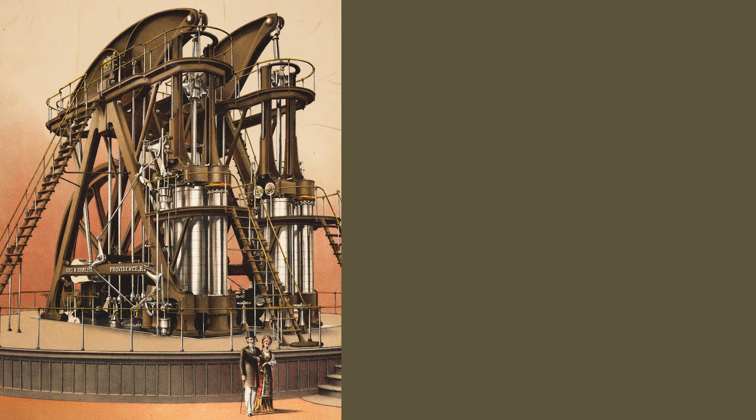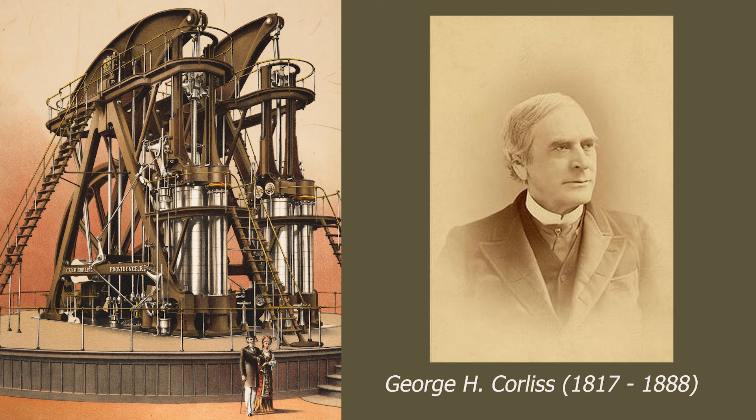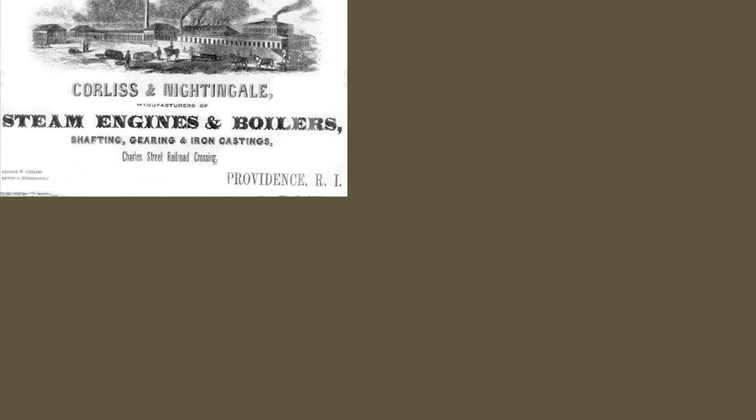George H. Corliss ranks with James Watt in his contributions to the improvement and refinement of the steam engine. Born in Easton, New York on June 2, 1817, he began his working life as a store clerk and inspector for textile manufacturers. In 1844, Corliss moved to Providence to organize a new company under the name Corliss, Nightingale and

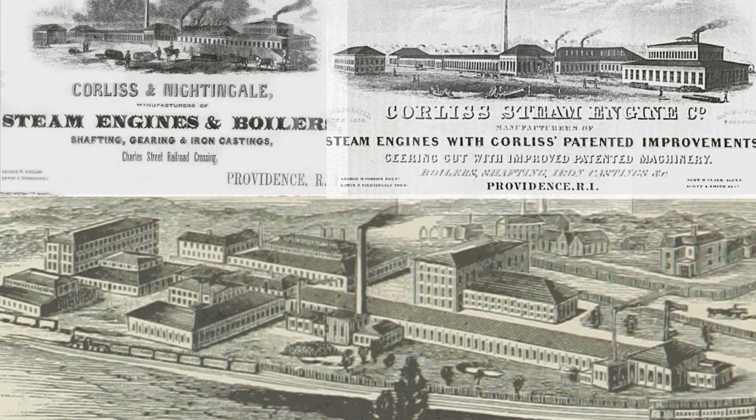Company. There, in 1848, Corliss invented an improved means for controlling the amount of steam admitted into the cylinder of a steam engine under varying load. The Corliss engine, in myriad forms, became the standard factory prime mover of the late 19th century.

To commemorate the 100th anniversary of the founding of the United States, it was decided to hold an international exhibition in Philadelphia in 1876. It was a great exercise in selling, as businesses in all fields and from all parts of the country and from abroad set up booths and exhibits in order to attract orders.

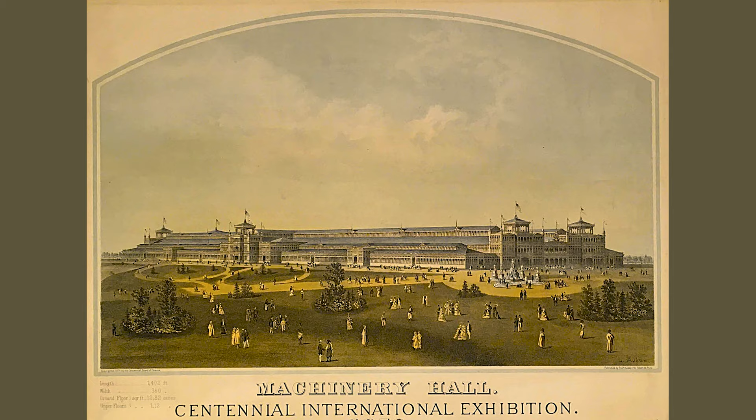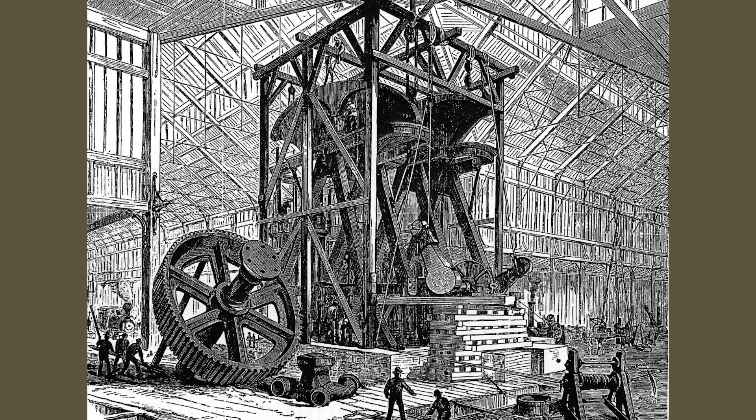Corliss offered to supply a single large engine with boilers and shafting to drive all of the main mechanical exhibits planned for Machinery Hall. All kinds of bureaucratic delays meant that construction did not begin until June 14, 1875, allowing only 10 months to design, build, transport, and erect about 700 tons of machinery.

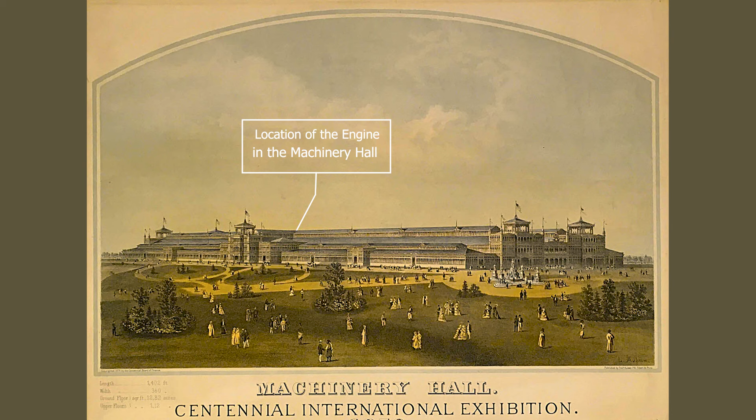Corliss's 1,400 horsepower monster engine, claimed to be the largest in the world, stood at the center of Machinery Hall, where the South Avenue intersected the central transept. The hall was 1,400 feet or 420 meters long, 360 feet or 110 meters wide, and stood 70 feet or 21 meters high where the engine was located.

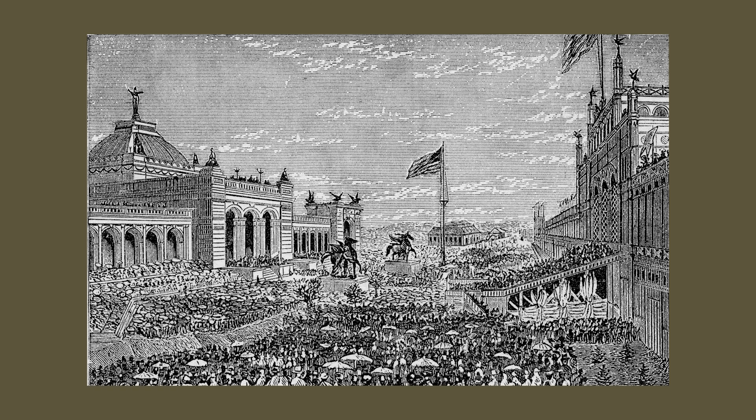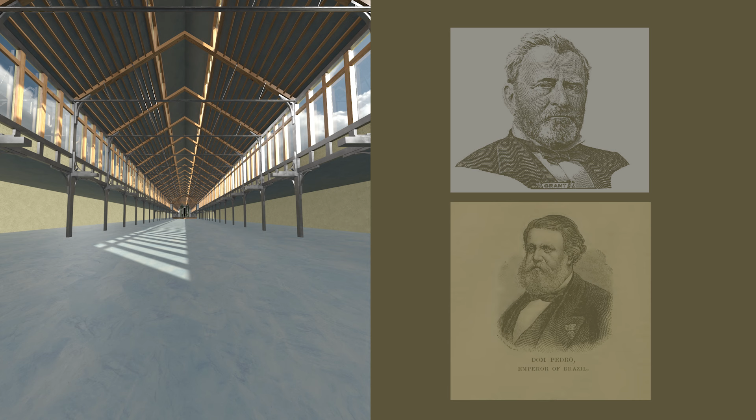The rain ceased on the morning of May 10, 1876, as tens of thousands of people gathered in front of the main exhibition building. After music, prayers, and speeches, President Ulysses Grant declared the exhibition open. President Grant and Emperor Dom Pedro of Brazil led a procession of officials and invited guests from around the world, touring through the main building and into Machinery Hall.

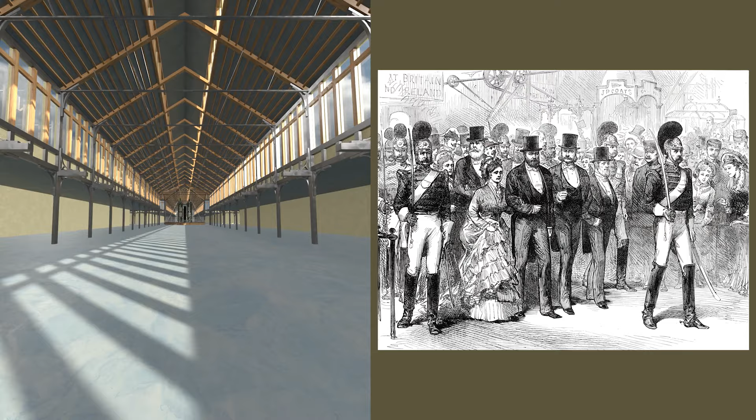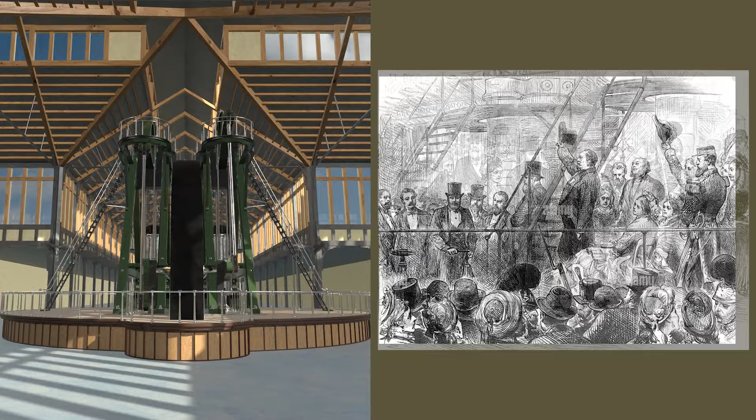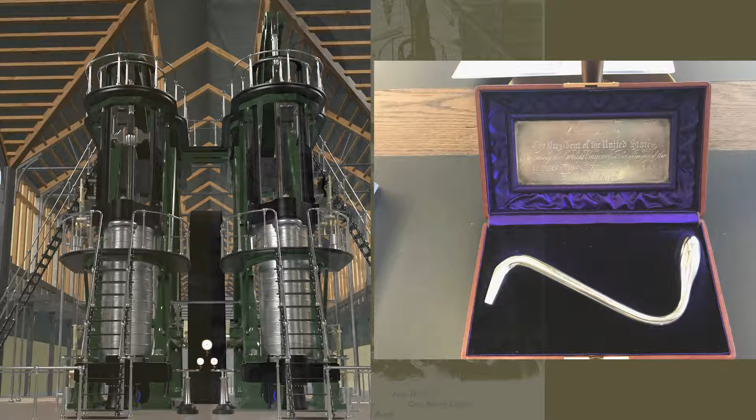When they arrived at the Corliss engine, Corliss stationed the president by the left steam stop valve handwheel and the emperor by the right, where each had a silver crank. George Corliss spoke. "It does not happen often in a man's existence to station two rulers of such nations at their posts to await his word of command. Are you both ready? Then your majesty will turn that handle."

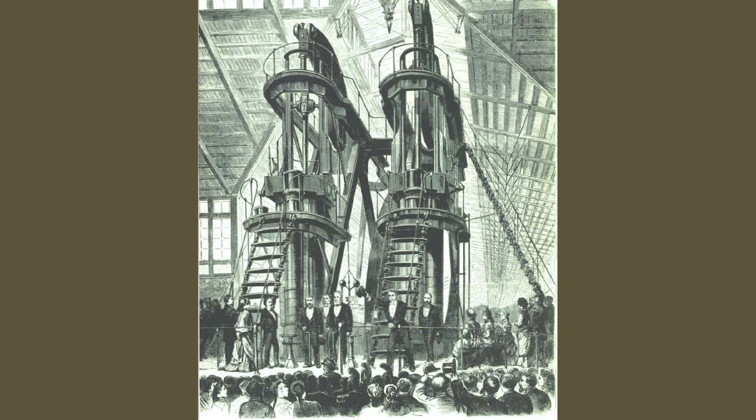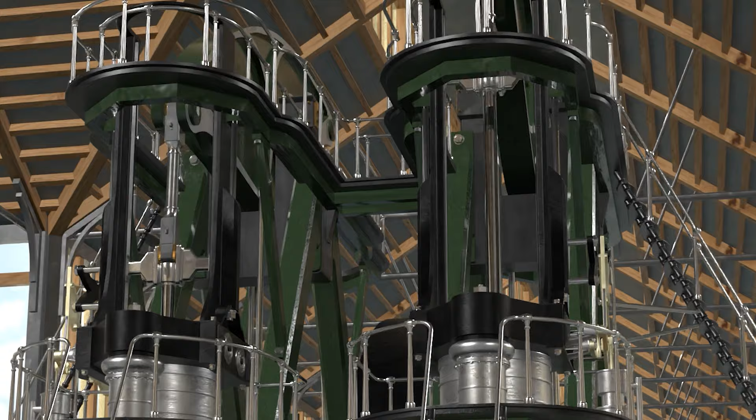A sound of a rush of steam. The great walking beam is seen to move. "Now, Mr. President, yours." The sound of steam is multiplied, and the other engine joins in the work. Within seconds, all the machines in the hall were working. These machines performed all sorts of tasks, including combing wool, spinning cotton, tearing hemp, printing newspapers, lithographing wallpaper, etc.

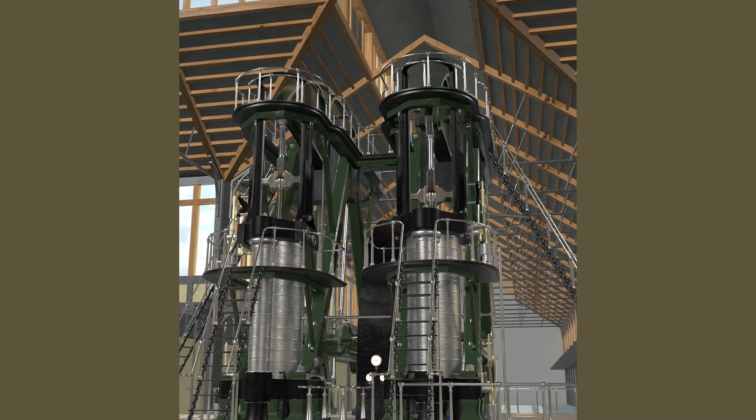The Centennial engine was the last American beam engine of any consequence. Although at the time the style was regarded already as completely obsolete, it is clear that Corliss employed it there for its monumental visual effect, and it was acclaimed as the ultimate manifestation of American technological prowess. For better visibility, we removed the building structures and decreased the rotational speed of the engine.

The Centennial engine consisted of two identical Corliss engines, with one common flywheel and one crankshaft on which were attached two cranks, shifted by 90 degrees one to the other. Also, the governor was common to both engines. The total height of the engine was 40 feet or 12.2 meters.

The cylinders were two in number, each 40-inch or 1 meter diameter, and 10-foot or 3-meter stroke with piston rods of steel. The cylinders were elaborately insulated, having a steam jacket, hair felting, a half-inch airspace, topped off by a polished iron casing. The casing for the cylinders and side pipes was a series of elaborate cast iron rings finished in a lathe and cut to make two half circles.

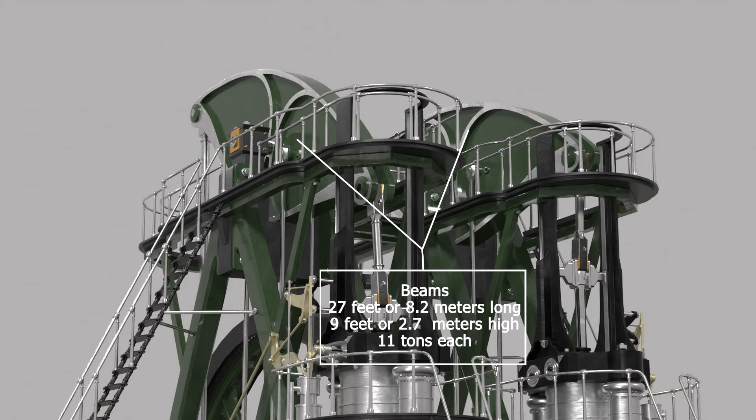Each beam was a single casting 27 feet or 8.2 meters long, 9 feet or 2.7 meters high in the middle, and weighed 11 tons.

Corliss estimated that the best scrap iron for making wrought iron was horseshoes, so about 9,600 horseshoes went to make the 24-foot or 7.3 meters long connecting rods.

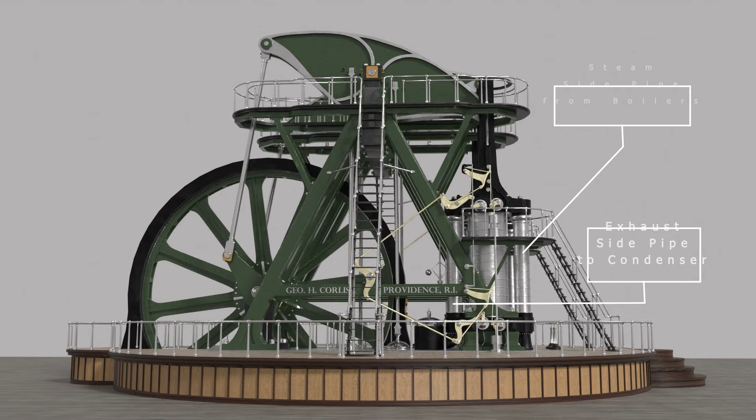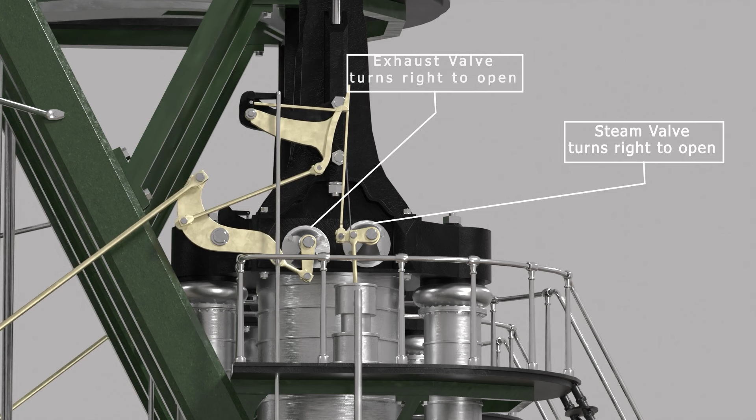Steam is brought to the cylinder by the steam side pipe, and the spent steam is evacuated from the cylinder to the condenser by the exhaust side pipe. Two rotary valves at top and bottom of the cylinder control the fresh steam flow in and spent steam flow out of the cylinder. These valves are driven by the eccentric wheel on the crankshaft through levers and wrist plates.

For the steam valves, its drop-off instance is controlled by the governor. See Part 2 of this movie series. The governor maintains the speed of the engine at a so good as constant value by controlling the drop-off instance of the steam admission valve, a major and patented invention by George Corliss, allowing an increase of efficiency of the engine up to 30%.

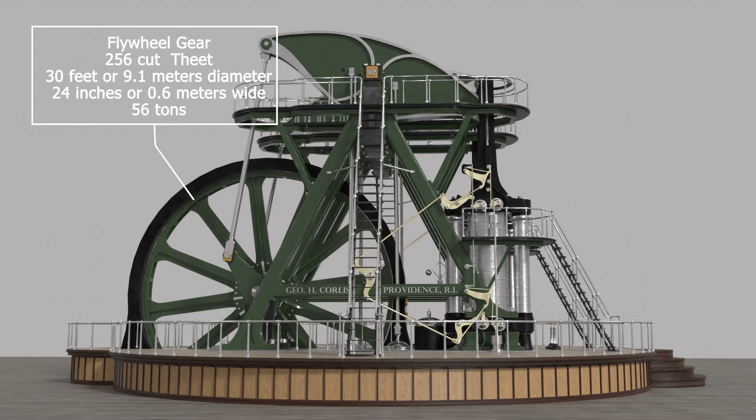The flywheel was a gear, 30 foot or 9.1 meter in diameter and 24-inch or 0.6 meter wide, with 256 cut teeth and weighing 56 tons. The crankshaft was common to both engines, 19-inch or 0.5 meter diameter and 12 foot or 3.7 meter long, was of best hammered iron, and the cranks weighed 3 tons each.

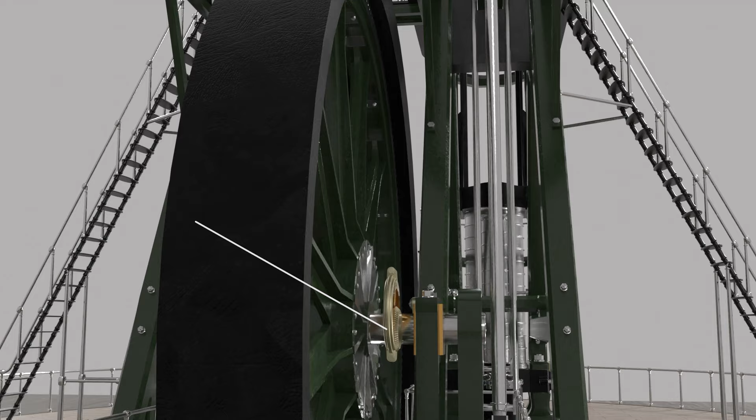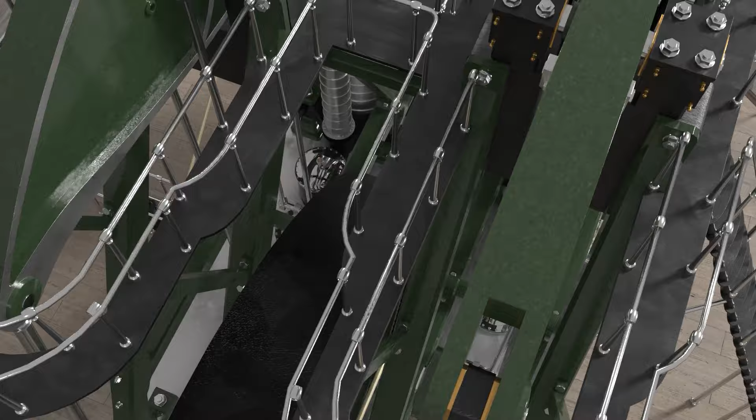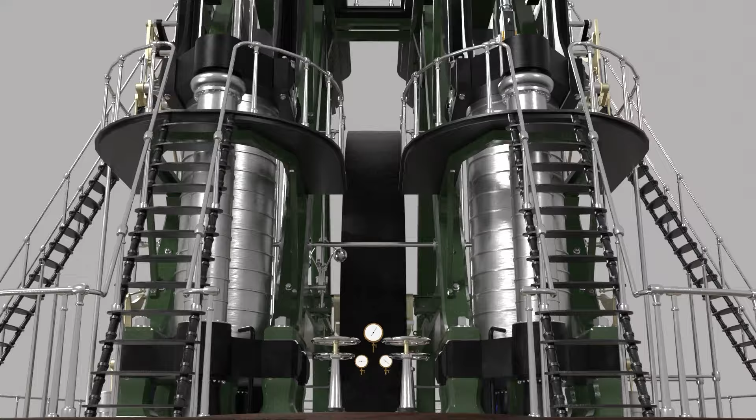The quietness and smoothness of operation of the engine was widely remarked upon, said the Scientific American Supplement. It is impossible to detect, at any time after they have been put up to speed, the slightest variation in the number of revolutions. The engines run as smoothly and noiselessly as a watch, and nothing can be heard but the slight swish of the dashpots as the steam valves are tripped.

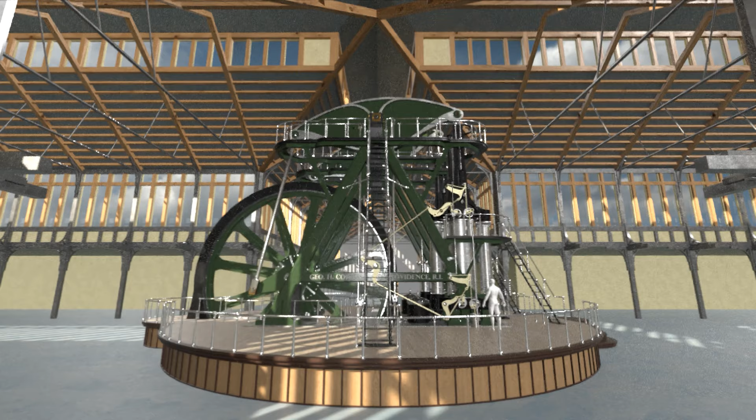The press was filled with comments about Corliss's monster engine. Engineering said, "The engine as erected is in such harmonious proportions in its different parts, and compares so well in dimensions with the building that contains it, that one loses all sense of its immensity in the contemplation of its beauty and strength." Various publications have stated that Corliss's vast Leviathan was the largest and most powerful steam engine in the world. However, other engines did approach, or even exceed, the Centennial Corliss engine in physical size or power.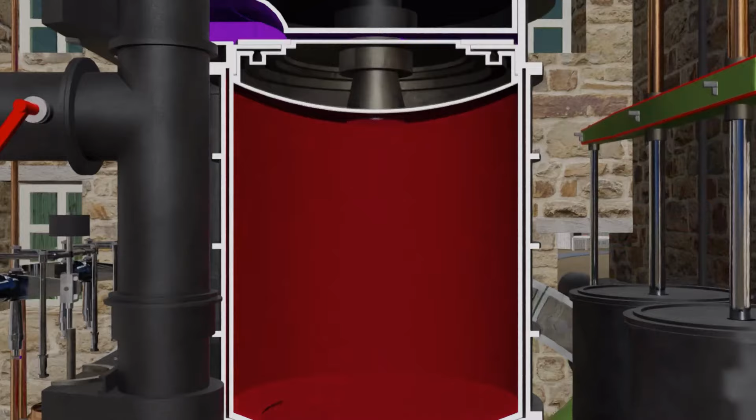One such example was the very large pumping engine named the President, which was set to work in 1872 to pump groundwater out of the Friedensville mine of the Lehigh Zinc Company in the Lehigh Valley, Pennsylvania. This massive beam engine had a single cylinder 110 inches diameter by 10 feet stroke, and the engine alone weighed 657 tons. It was estimated at 1,600 horsepower and could raise 19,000 gallons per minute from a depth of 350 feet.

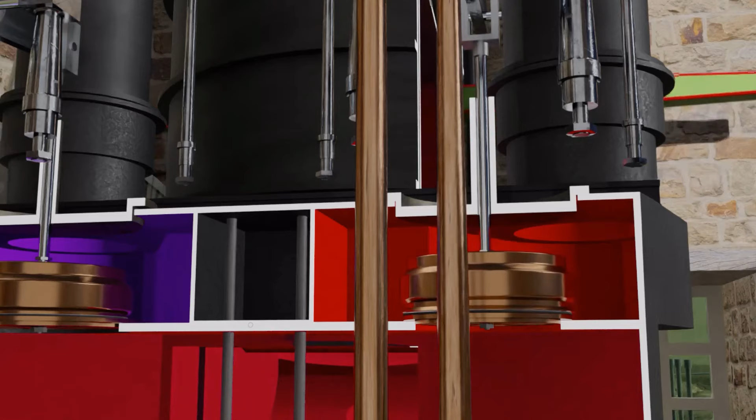The engineer estimated that the President was the largest fixed single-cylinder engine in the world, and it certainly had greater weight, horsepower, and cylinder volume than the Centennial engine. The Corliss Centennial engine was, however, undoubtedly more elegant and much more efficient.

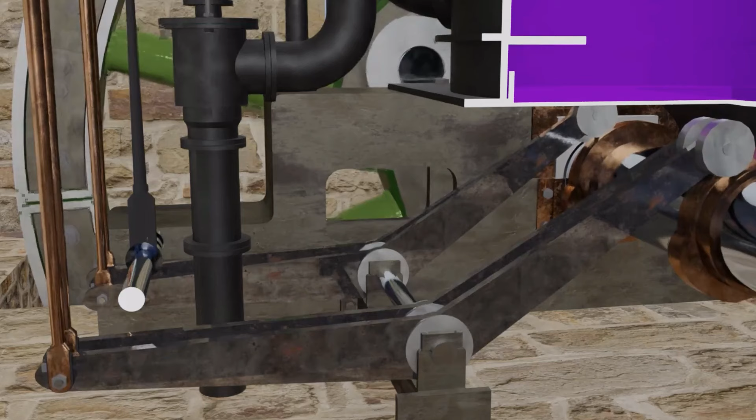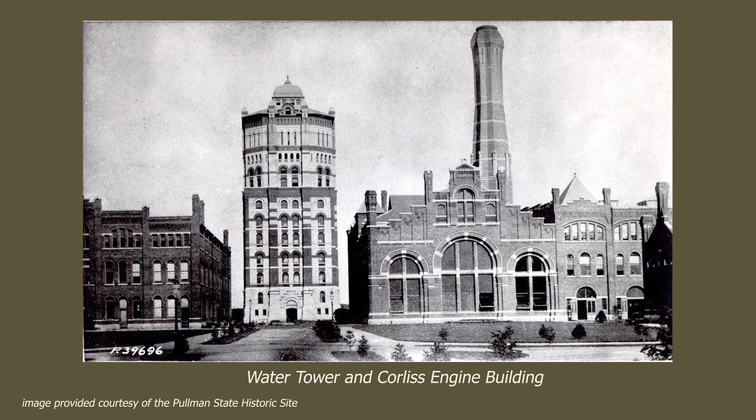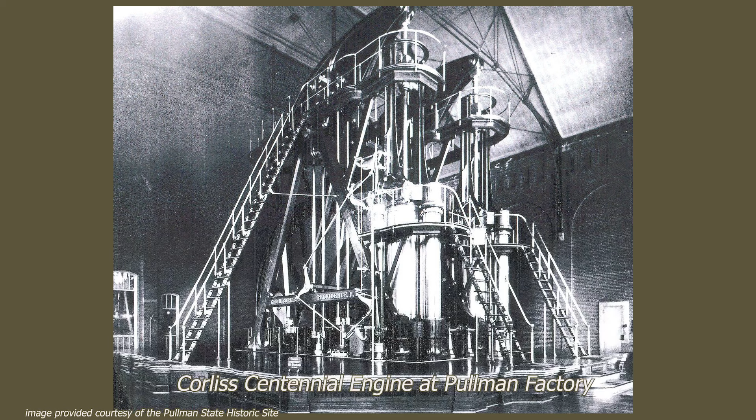The Centennial Corliss engine remained in service long after the exposition closed. George Pullman, president of the Chicago-based railroad car manufacturer, purchased the engine to power one of his factories. The old engine was not scrapped until 1910, after 34 years of service. By then, the old-fashioned Corliss engine was completely obsolete. It had been supplanted by Charles Parsons' compact, much more efficient steam turbines and electrical motors, which are still used in power plants and ships to this day.